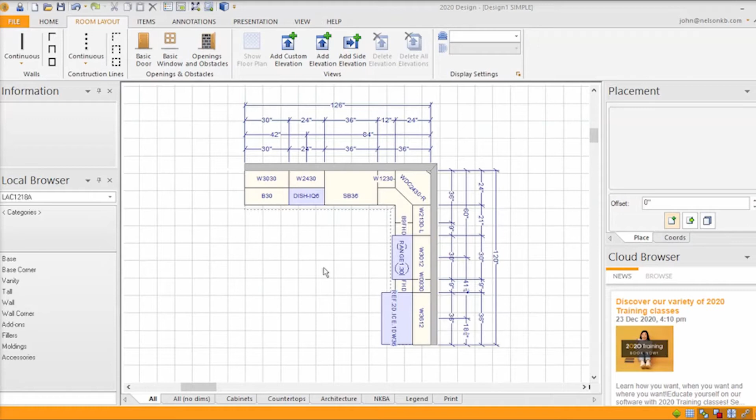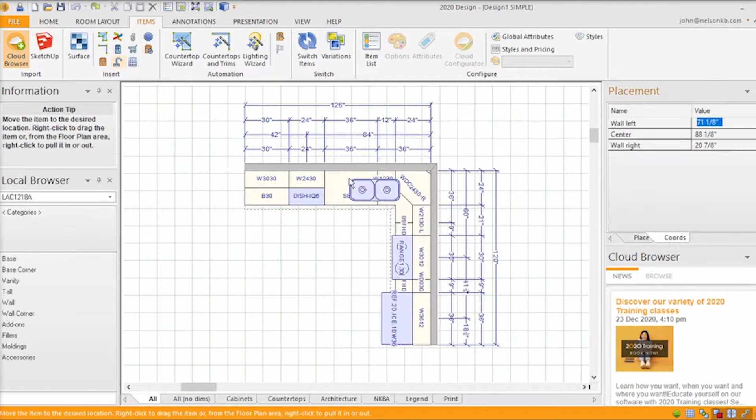The first step is to add the sink. In the toolbar, select Items and click on the faucet icon. A pop-up menu will appear with plumbing fixtures. Please select Sink. Our clients usually request the undermount sink, and in the menu option, you can choose several different sizes. For our design, the best fit is the 34-inch sink. Once you have selected the sink, hover above the sink base and left-click to drop it inside the cabinet.

The next step is to add the countertops, top molding, and toe kicks. In the toolbar, select Countertops and Trims. Make sure to select all three items in the pop-up menu and click Add for the program to automatically insert all three items. Changing the default countertops is very simple.

Right-click anywhere on the countertop area and select Square Foot Top, Attributes, and a pop-up menu with attributes should appear. Please click on the Variables tab and select the color in the Countertop Textures variable. The default catalog comes with several options, but we recommend importing your own textures. Our favorite countertop is Calacatta Marble, and it goes great with white and gray cabinets. Importing your own textures is easy to do and will be covered in a following lesson.

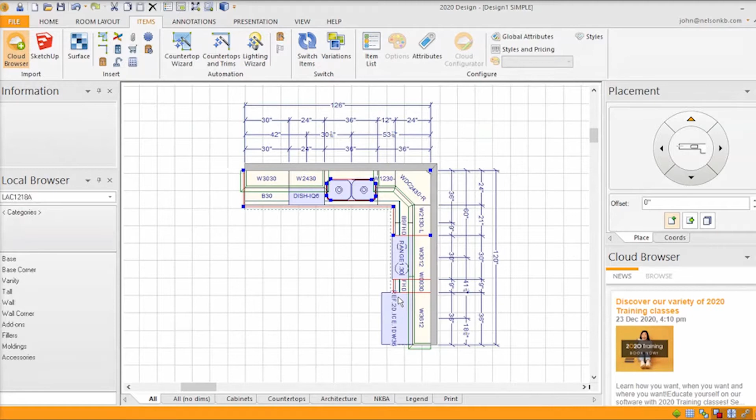If you have any cabinets separated from the main countertop area, you will have to manually change the attributes to it as well. In our instance, the base 09 is separated from the main countertop area by the range. Thus, we have to repeat the steps in order to change the countertop for this area as well.

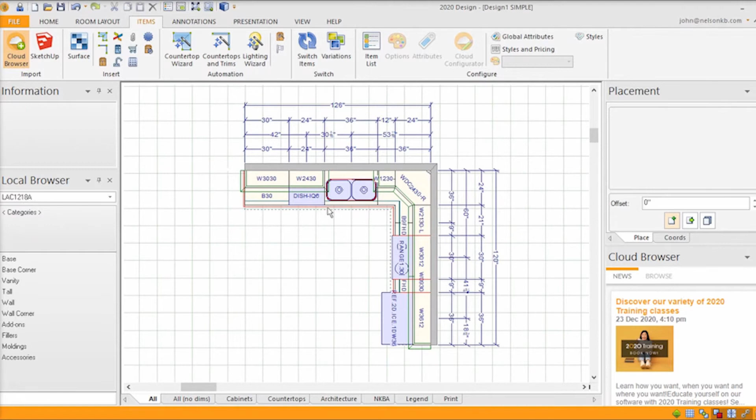After adding the sink and countertop, the next step is to create the backsplash. In order to access the elevation view, please left-click on the dotted line and a split screen should appear. In the toolbar, select Surface, and in the upper split screen, outline the area where you want the backsplash to be applied to. A pop-up menu for attributes of surface will appear.

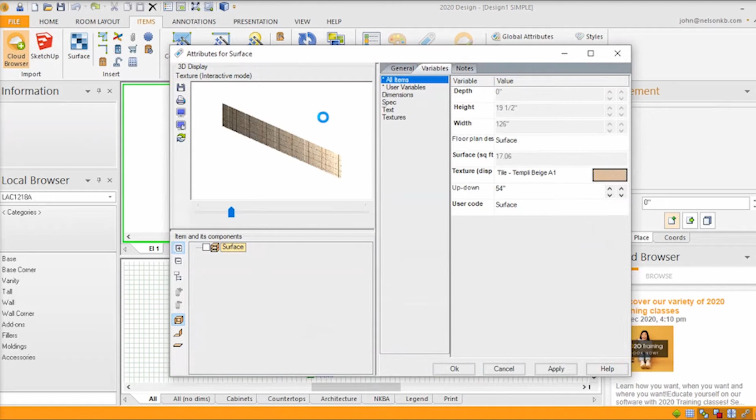If you would like to change the texture, open the Variables tab. Click on the texture color and several options will appear. Again, we recommend importing your own texture. Our favorite backsplash texture is Subway Tile, as it nicely complements white and gray cabinets. Please make sure to repeat the same steps for all the walls.

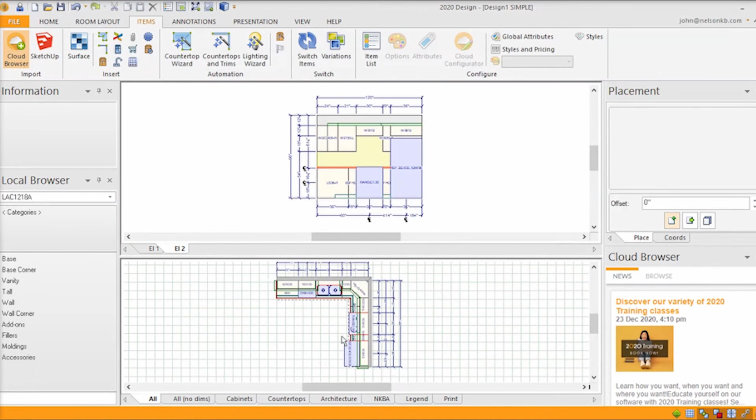Once you are done, exit out of the split screen by selecting Room Layout in the toolbar and selecting Delete Elevation. The last step is to add flooring. Go to the toolbar, select Items, Surfaces, and outline the area where you want the flooring to be applied to. We recommend selecting the perimeter of the room.

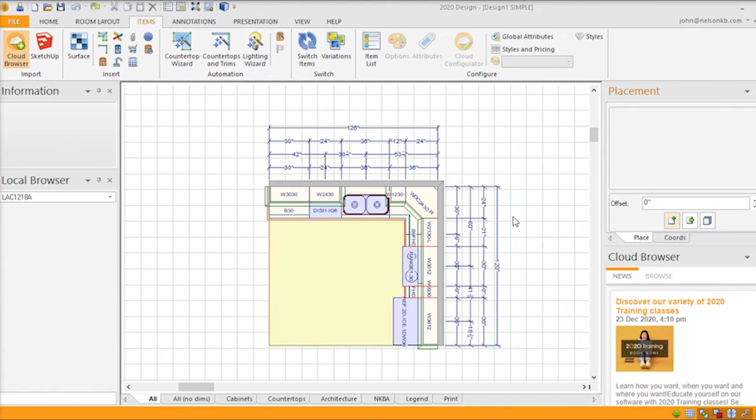Once the area is selected, a pop-up menu for attributes of surface will appear. If you would like to change the texture, in the Variables tab, click on the texture color and several options will appear. Again, we recommend importing your own texture. Our favorite flooring texture is hardwood, as it provides a nice contrast for white and gray cabinets. There you have it, a quick lesson in upgrading the kitchen design for your customer.